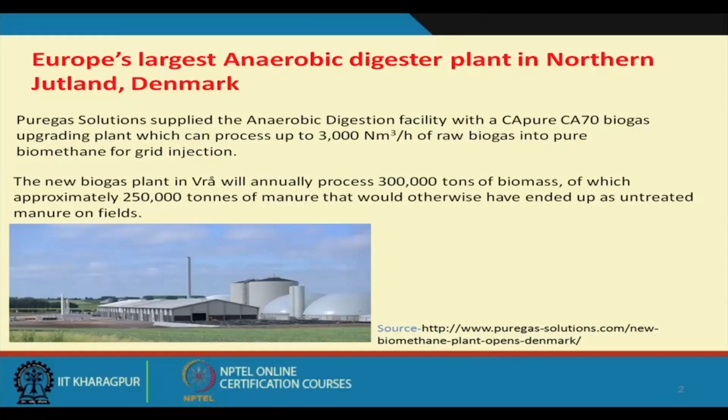Now, look at the approximate chemical composition of biogas, biomethane and natural gas, and how they are comparable with each other. Biogas usually contains 40 to 70% methane and 30 to 60% carbon dioxide. When it is passed through a purification process, what we call a carbon dioxide absorption process, we can produce about 99% methane, with carbon dioxide varying from 0 to 5%. Natural gas contains about 75 to 99% methane and alkanes, that is ethane, propane, butane, 0 to 25%.

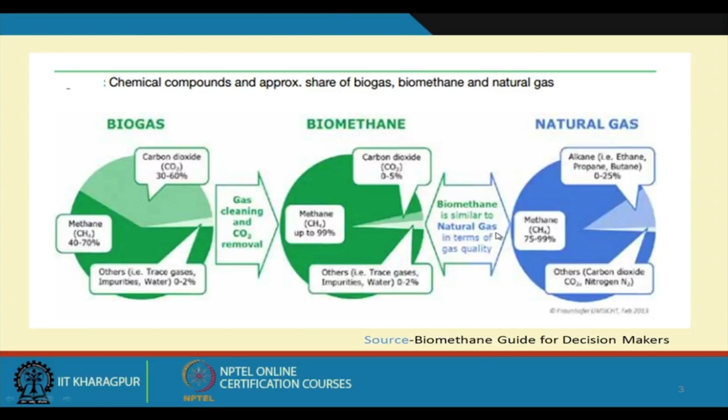So it is quite comparable. As I told you, in our country CNG, compressed natural gas, is used for running vehicles, largely by the transportation sector, and it contains mostly methane. Now, this biomethane satisfies all three principles: security of supply, sustainability and competitiveness.

Security of energy supply: a strong need exists to minimize the risks of exposure to fossil fuel price volatility, and to ensure the security of energy supply by diversifying the existing energy production sources. Sustainability: since we are using this process from waste material, this waste will be available, so this process can be sustainable for a long period of time.

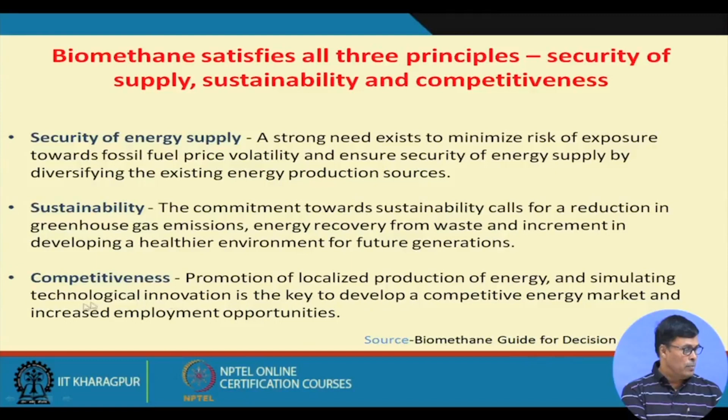As I told you, the biomethanation process has several applications: electricity generation, heat generation, vehicle fuel and material use. Natural gas is used as a reactive carbon source in chemical processes, for example fertilizer production, and it is largely used in iron ore reduction. So biomethane has tremendous potential in the market.

Now, this is a table which compares CNG and raw biogas. You can see how they are comparable with each other. So that is how biogas plays a very important role in the world market.

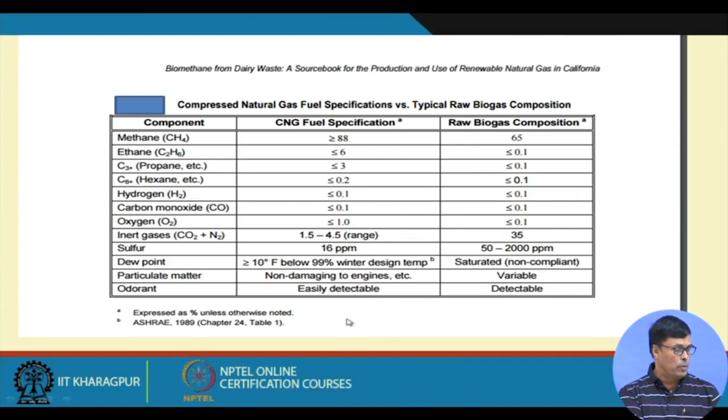Biomethanation turns waste into energy, producing low carbon gas while restoring the soil. Most high carbon fuels, when burned, produce a lot of particulate matter in the air that causes environmental pollution. Since methane is the lowest hydrocarbon, the amount of carbon emission is very low compared to any higher hydrocarbon. So it is environmentally safe.

Now, I told you that I want to make a comparative study with the chemical process, how methane produced chemically compares with the biological process. Methane can be produced from coal. The chemical route is from coal, and the biological route is from distillery effluent, with our basis being 100 cubic meters of methane production per day.

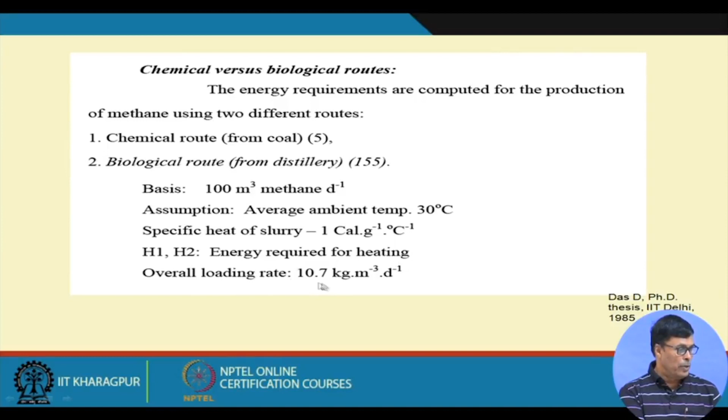Assumptions: ambient temperature 30 degrees centigrade, specific heat 1 calorie per gram per degree centigrade, H1 and H2 are the energy required for heating, and overall loading rate is 10.7 kg per cubic meter per day. Now, this is the biological process. As I told you, it is operated in 2 stages: acidogens and methanogens. In the acidogenic process the retention time is 1.5 days, and in the methanogenic process it is 6 days.

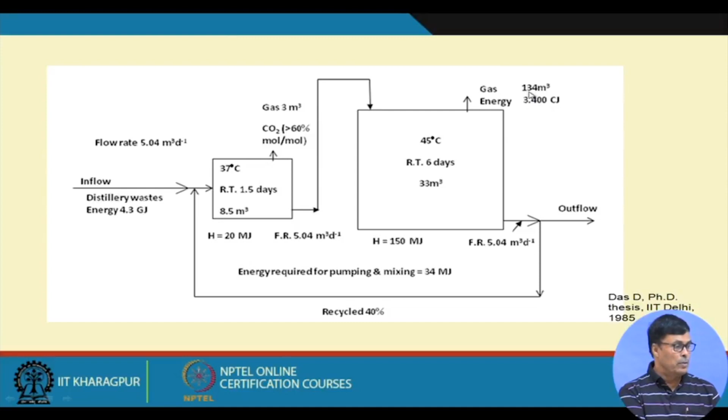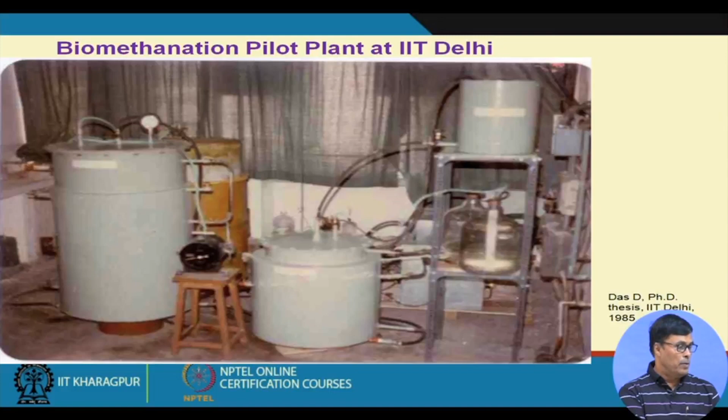So this is the 2-stage process we operated at IIT Delhi. This is the acidogenic reactor, this is the methanogenic reactor. This is the pilot plant we operated very successfully, and we find that the distillery effluent can be very easily used, and we use it for the production of methane and carbon dioxide.

Now, if you look at the chemical routes, how the carbon is converted to methane, this is by using gasification and methanation. This is the stoichiometry of how methane is produced. In partial hydrogenation, this is the stoichiometry that we have. In the direct hydrogenation, the stoichiometry of the process is like this.

Now, when you make a comparative study of the thermal efficiency of the ideal process for conversion of carbon to methane, the basis is 100 cubic meters of methane production. We have 53.2% efficiency in the case of gasification and methanation. In the case of hydrogenation, from carbon it is 65.3%, hydrogen from the product methane.

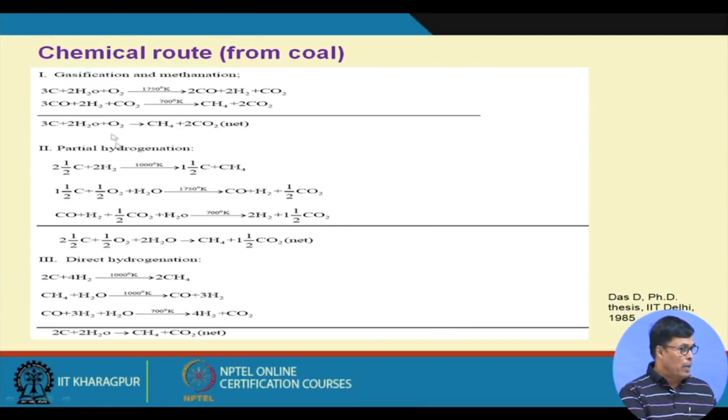I can show you this: the gasification and methanation, partial hydrogenation and direct hydrogenation. If you look at these processes, the second process appears to be better as compared to the other 2 processes. The partial hydrogenation is good from the energy point of view; it is quite attractive. Now, that is how we compare this process with the biological process.

This is very interesting: the energy content of the substrate in the form of carbon, in the case of coal, is 3.999 gigajoule, and in the case of the biomethanation process in the form of distillery effluent it is 4.3. The external energy requirement here is 1.205 gigajoule, and this is 0.204, because this process occurs at high temperature and high pressure, while this occurs close to ambient temperature and atmospheric pressure. So the net energy required, this plus this, will be like this.

And here gross energy requirement means how much energy is required per gigajoule of product. So here we find in the chemical process 0.35 gigajoule of energy required per gigajoule of methane production, and in the case of the biomethanation process 0.06 gigajoule of energy required per gigajoule of methane production.

So this is a very interesting parameter, what we call net utilizable energy product. This is equal to externally utilizable energy minus secondary energy input. This is what we call secondary energy input. So externally utilizable energy is this much, this minus this divided by primary energy available in the form of raw materials. That gives 54.9%, and this is 74.3%.

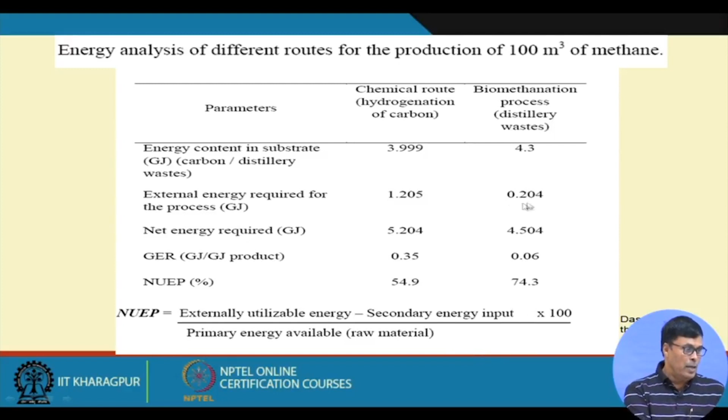That means the energy that you get in the form of methane you can largely use for other purposes, because of the energy you recovered in the form of methane, a smaller amount is required for meeting the energy requirement of the process. This is how we can justify that the biological process is more attractive as compared to the chemical process.

Now, other stoichiometry I have. This is the kind of equation that we have: 1 mole of glucose produces 3 moles of acetic acid, and 3 moles of acetic acid produce 3 moles of carbon dioxide and 3 moles of methane. And again when you oxidize this methane, you require 6 moles of oxygen.

So if you convert it, how much kg of methane per kg of BOD, this is the equivalent amount of BOD. This is 48: 3 into 12 plus 4, that is 16, and 16 into 3 is 48. 48 divided by 192 is 0.25. That means per kg of BOD removal, the theoretical production is 0.25 kg.

Now, if you multiply it with 22.4 liters, since we know at NTP 1 gram mole of gas is equivalent to 22.4 liters, you will find 0.25 kg of methane is equivalent to 0.35 cubic meter of methane. Now, this is the equation that we have, where E is the efficiency of waste utilization, normally ranging from 0.6 to 0.9 under satisfactory operational conditions.

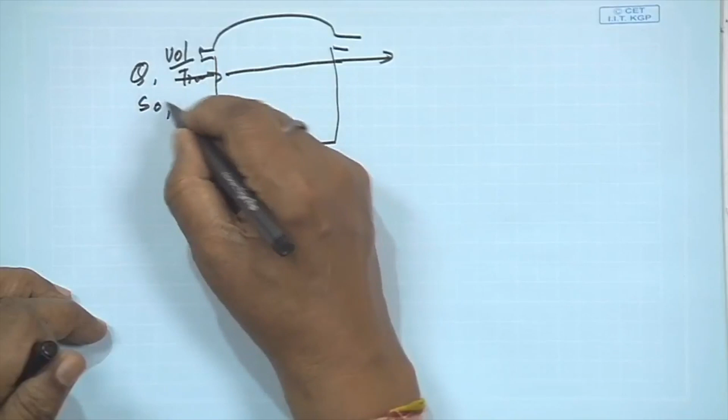Now, Q is, I told you, suppose this is the anaerobic digestion process, and you are passing Q, the flow rate, and S0, the substrate. So, what is the unit of Q? Q is volume per unit time, and the unit of this is mass per unit volume. So, if you multiply Q into S0, it is nothing but mass per unit time.

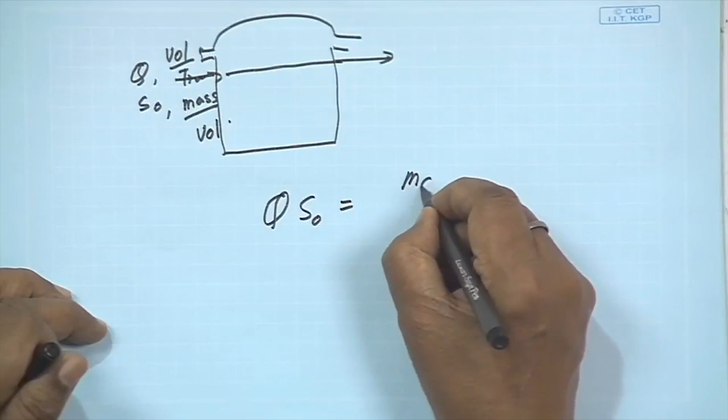So, now if you multiply it by utilization efficiency, that is E, then what will happen? If you multiply this by E, then how much of this biomass can be converted into gas, that you can find out. And you have already seen that 1 kg BODU can produce 0.35 cubic meter of methane. So, if you multiply by this, you will get how much methane is produced.

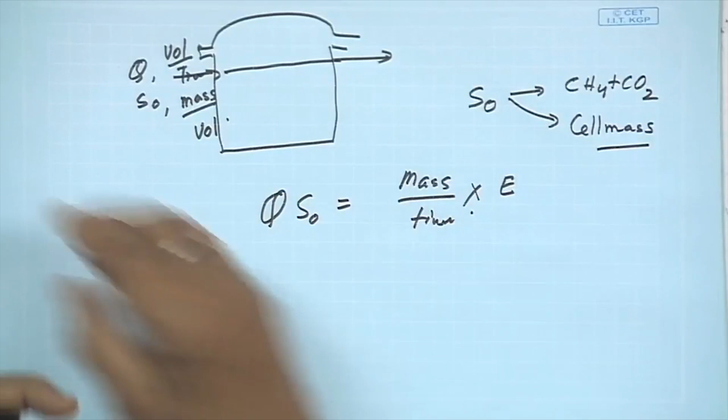Now, problem is that when you consider this conversion process, I told you, a part of this substrate will go for the methane and carbon dioxide, and a part will go for cell mass production. So, cell mass remains in the system. So, when you consider the conversion, the amount of energy stored in the form of cell mass, that also you have to minus.

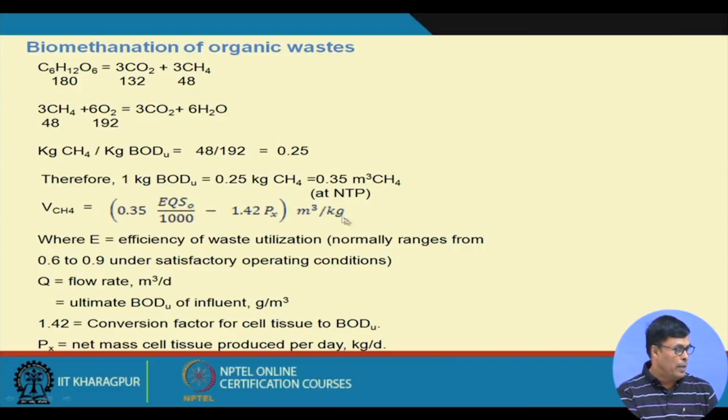We have already seen that for the oxidation of 1 gram of cell mass, you require 1.42 grams of oxygen. So if you minus this, then you will find the exact amount of methane produced per kg of waste. This you can calculate. Now this is the equation. This is the rate of cell mass formation. It can be expressed like this.

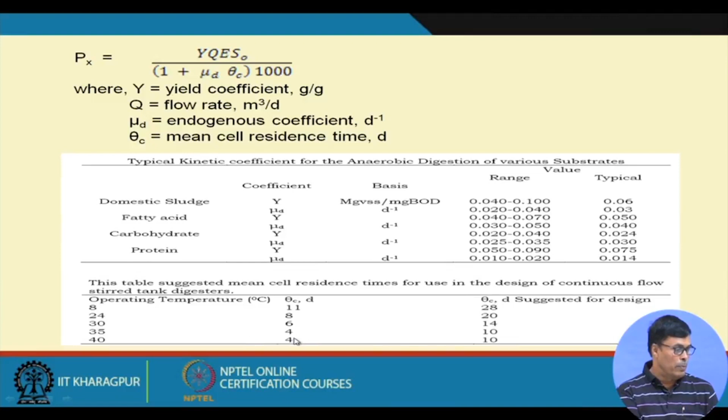This is the formula that we have, and this is the typical kinetic coefficient of the anaerobic digester for various substrates. We have domestic sludge, fatty acid, carbohydrate and protein. The yield coefficient and specific death rate constant vary from each other, and the table shows the mean cell residence time, what we call solid retention time, which will be different at different temperatures. At higher temperature this will be reduced, because your organisms will be more active.

Now I want to solve one kind of problem that is very much useful for the anaerobic digestion process. Estimate the size of digester required to treat the sludge from a preliminary treatment plant designed to treat 38,000 cubic meter per day of wastewater. Find out the volumetric loading, estimate the percent stabilization and amount of gas produced from the wastewater to be treated. It has been found that the quantity of dry solid and BOD removed is 0.15 kg per cubic meter and 0.14 kg per cubic meter respectively.

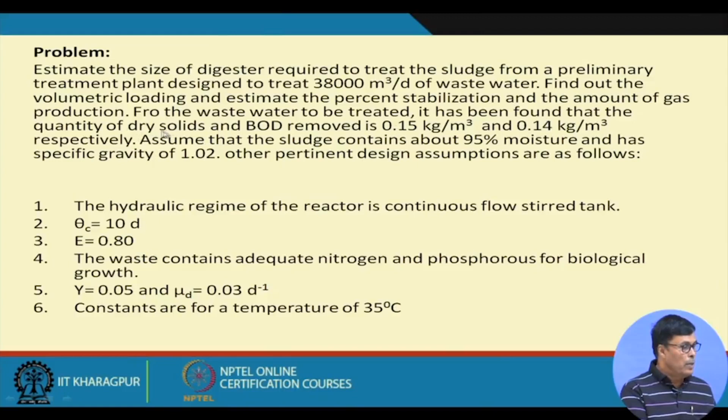Assume the sludge contains 95% moisture. It has a specific gravity of 1.02. Other pertinent assumptions are given below. You have to find out that. So first we shall have to find out the sludge volume. We have already seen this here. The dry solid content is 0.15 kg per cubic meter, and this is the flow rate. If you multiply it by this, you will find the total amount of sludge.

It contains 95% moisture, so you divide by 0.05, you will get the wet mass, and the wet mass has a density of 1.02 into 1000 kg per cubic meter. If you divide by that, you will get the volume of the sludge. And then similarly you can calculate the BODU loading to be removed. The digester volume you can easily calculate by Q into theta C, and you can find out the volume of the digester.

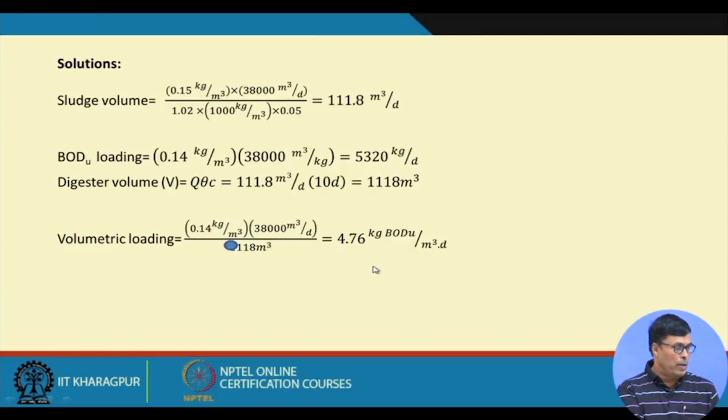Then volumetric loading is how much total solid we are putting in the reactor divided by the volume of the reactor. Per unit volume of the reactor, how much solid material you are putting in the reactor, that is considered as the volumetric loading. Now rate of production of the cell mass can be expressed like this. I have already shown, and this value is like this.

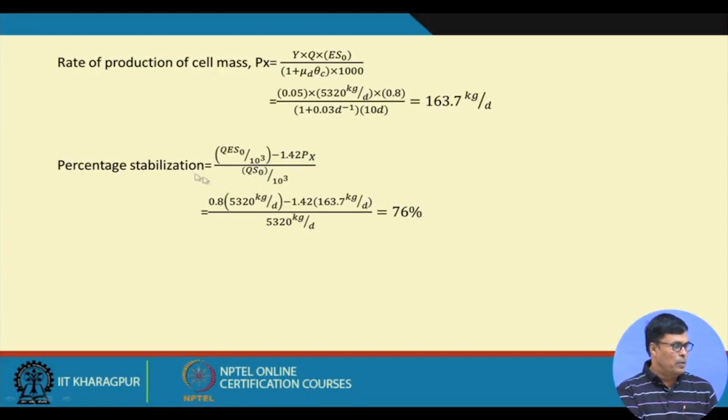Percentage stabilization: this is the substrate removal efficiency, how much substrate is removed, and this is how much substrate is in the cell mass present in the reactor. If you minus this, then you will find the actual amount of BOD removed for gas formation, and this is the input of the substrate. So if you divide by that, you will get the percentage stabilization. That is how you can calculate 76%. For the rate of methane, we already have this equation. You put the different values in the equation, you will get how much methane is produced.

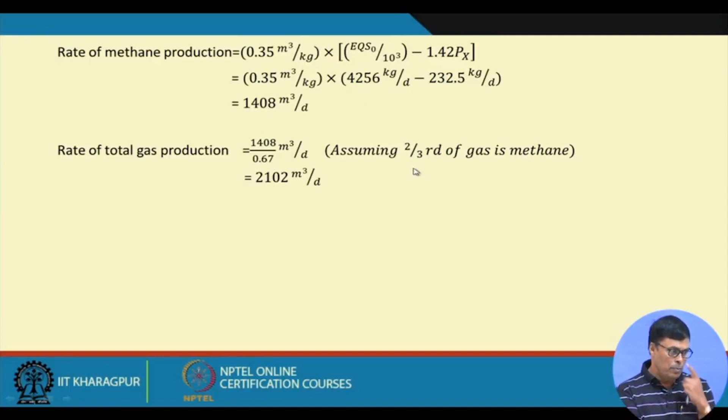Now if we assume 2/3 of the gas is methane, we can find out the total gas produced in the system. I want to share with you a very interesting process called landfill gas generation. This process is largely in operation in Western countries, but unfortunately not in India, because every country generates a lot of solid waste every day, and per capita production of solid waste in cosmopolitan cities is much higher compared to villages.

Villages produce quite less, because it has been observed that the amount of solid waste generated per person per day also determines the economic status of the people. A typical example: in the USA, the per capita production of organic municipal solid waste is about 2 kg. But in cosmopolitan cities in India, it is around 0.5 kg. So that indicates the economic status of the people, and the difference is huge.

But one thing we should remember is that our population is very high compared to Western countries. So even though per capita production is very less, if we multiply it by the number of people, the total amount will be very high. So what I want to point out is that the availability of raw materials is very high.

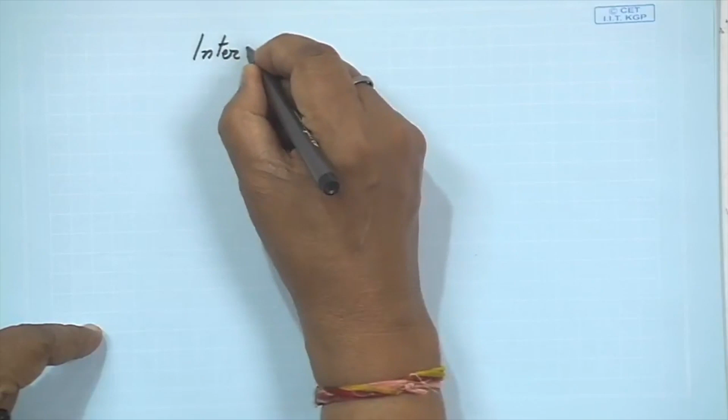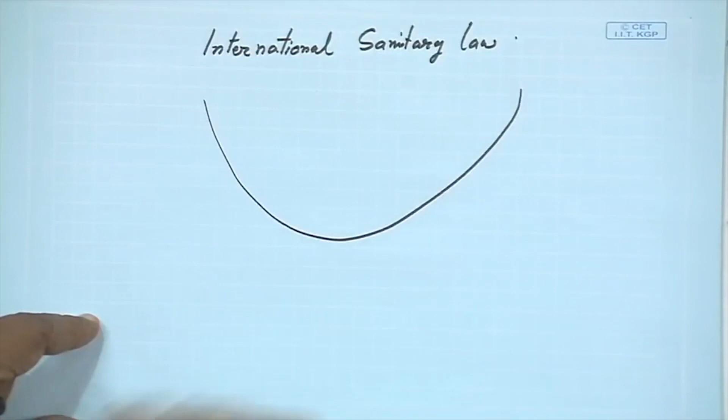But the only problem is that in India we are not following the international sanitary law. This law says: suppose this is the landfill where you put your waste. If you dispose any kind of solid waste, within 24 hours it should be covered with a 6-inch clay layer.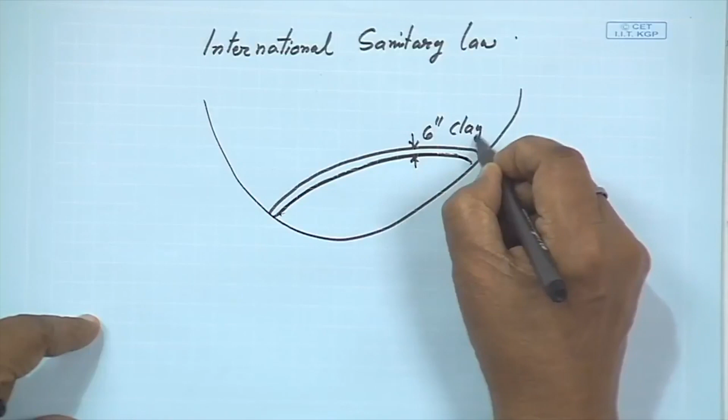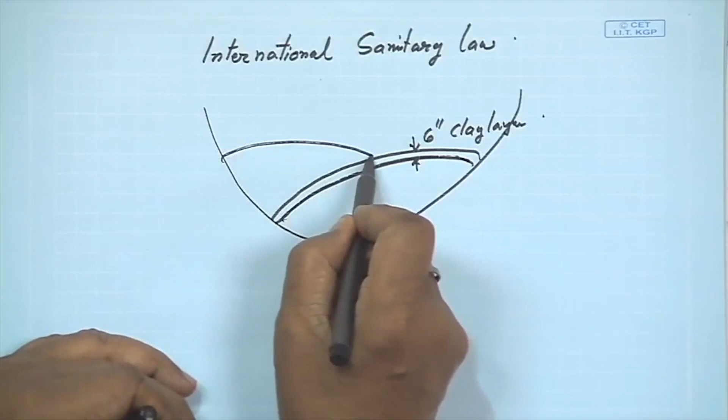Why? Because they observed that within 24 hours biodegradation will take place, and since biodegradation takes place, a lot of bad gases will come out to the atmosphere and pollute the environment. So to safeguard the environment, within 24 hours it should be covered with a 6-inch thick clay layer. Like this, you can have another layer, and another layer, and fill up your landfill this way.

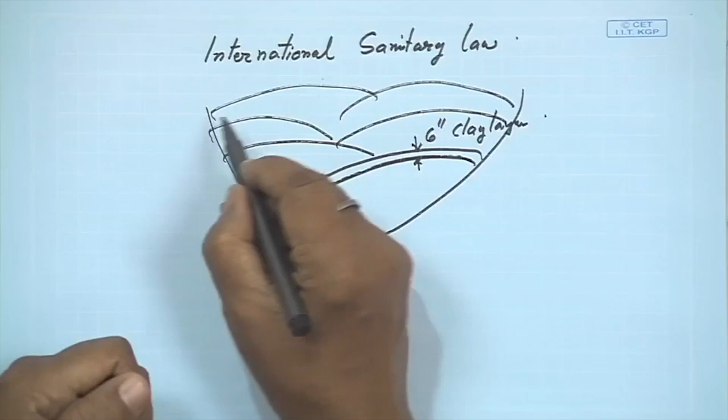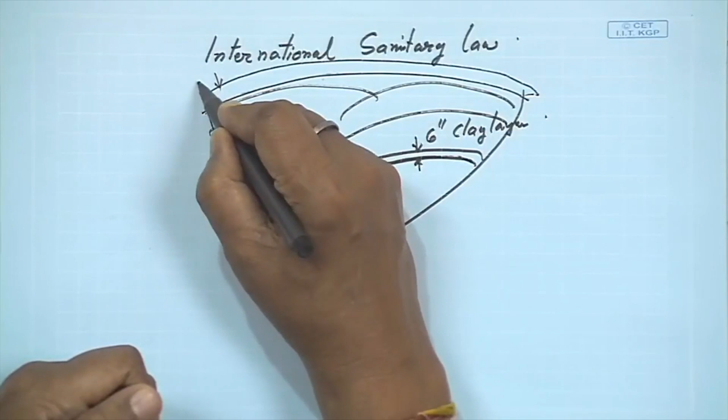This is the international sanitary law. At the end, when it is totally filled, it is covered with a thick layer, maybe 18 inches thick, to ensure no gas goes out from the system.

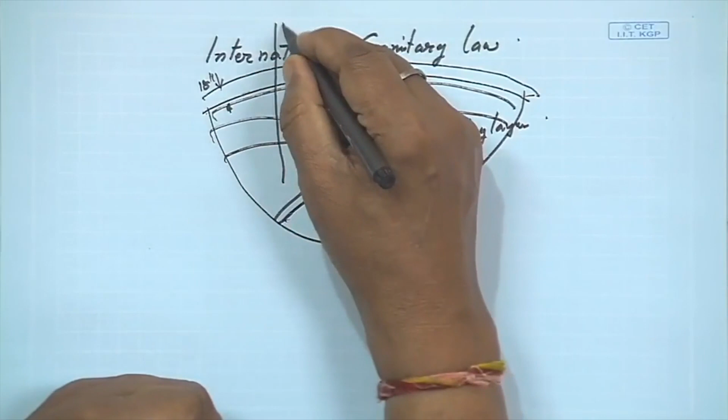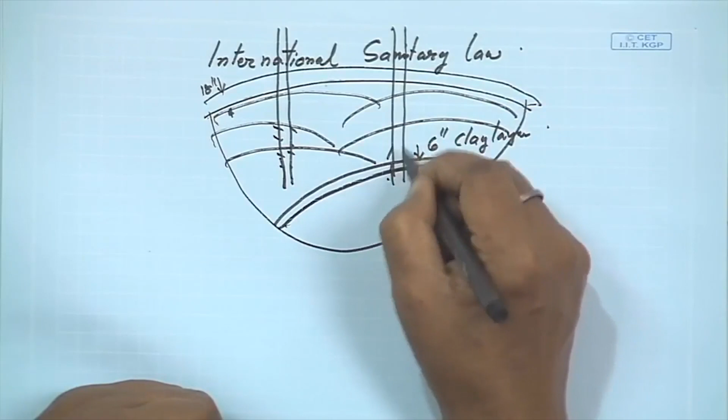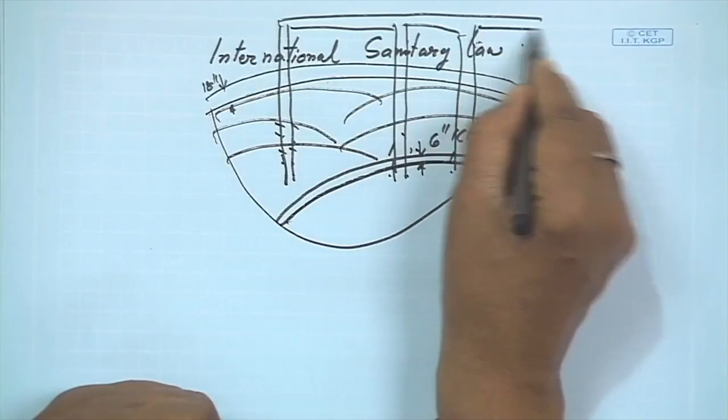Then they make a well using perforated pipes put inside. We put different perforated pipes here, and interconnect them. If we create a little vacuum in the line, then whatever gas is produced will come through here. This gas mostly contains methane and carbon dioxide.

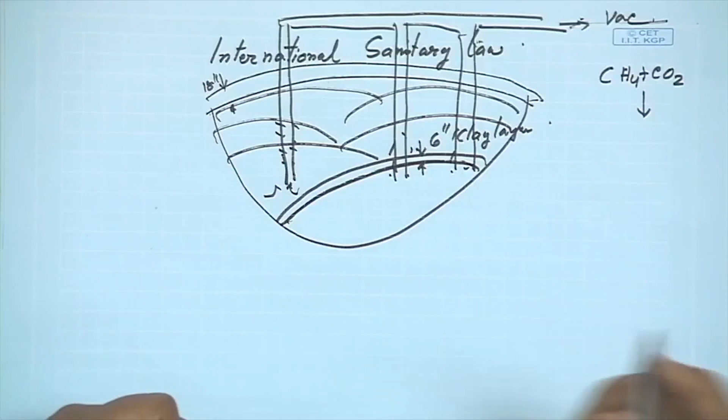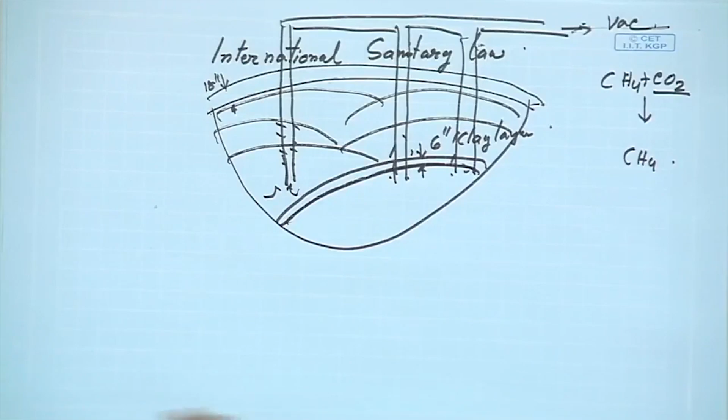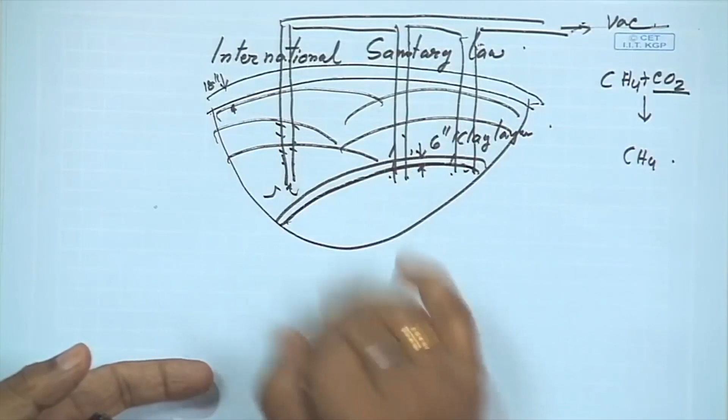Then we pass it through a carbon dioxide absorption column, remove the carbon dioxide, and get pure methane. This is largely practiced in Western countries, and after the stability of this process, they can use this landfill to prepare beautiful parks, playgrounds, and amenity centers. The only disadvantage is that nobody can build a multi-story building here, because the soil quality is not as good as normal soil, though it is considered very fertile land, good for parks and playgrounds.

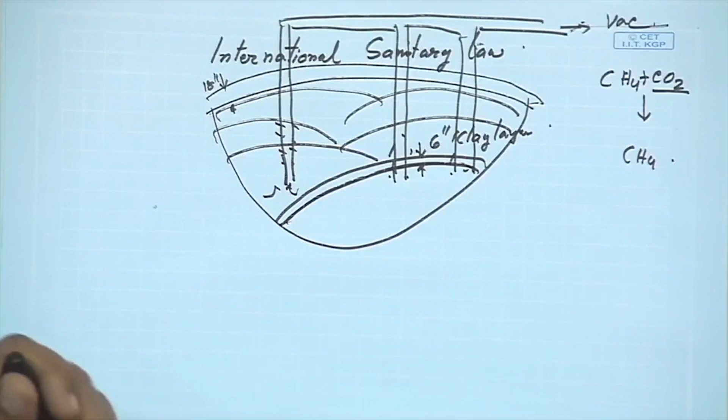I was thinking about how best we can utilize municipal solid waste in India. I was considering that the age of the landfill is 5 to 10 years, which is pretty long. So we did some research work to find out how this time can be reduced, because acidogenesis is much faster compared to methanogenesis.

So what we did was carry out the acidogenic reaction in a particular reactor. We build up the solid bed and sprinkle the acidogenic culture, recycling it again and again until stabilization takes place. When we find the bed is totally stabilized, we pass the liquid through the methanogenic reactor.

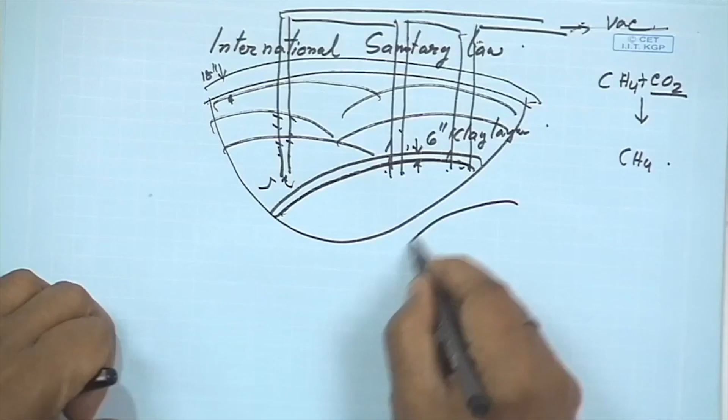Our suggestion was this: as time passes, in cosmopolitan cities land becomes very costly. As landfills fill up with waste material, new sites have to go to distant places, so the hauling distance increases drastically, and as hauling distance increases, the cost of transportation increases to a great extent.

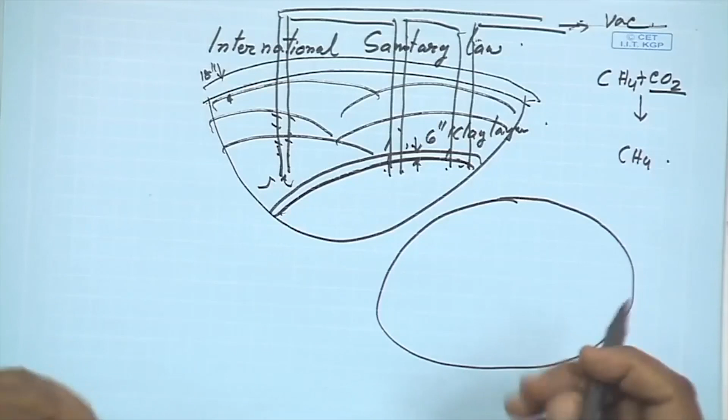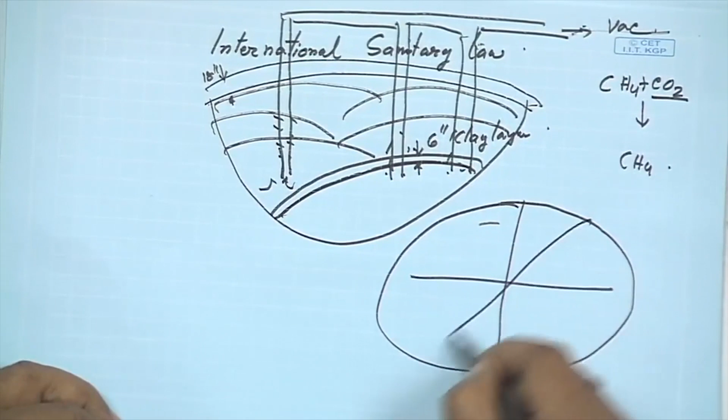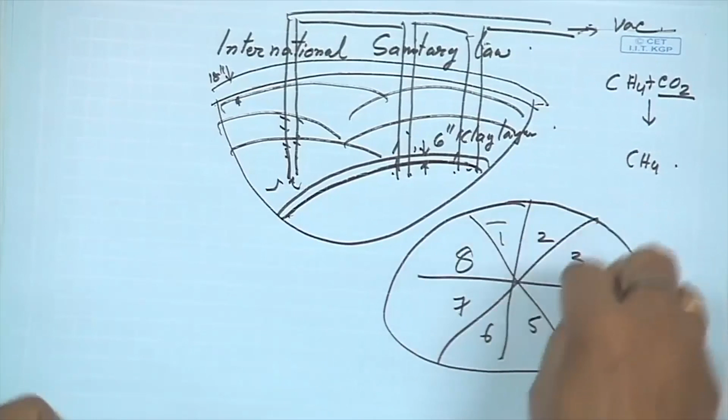Our suggestion was that if you identify one particular piece of land in a cosmopolitan city, you can divide it into sections, say 1 through 8, with different wells, and put the raw materials in one after another. Through our research we found that stabilization of this reactor hardly requires 40 days.

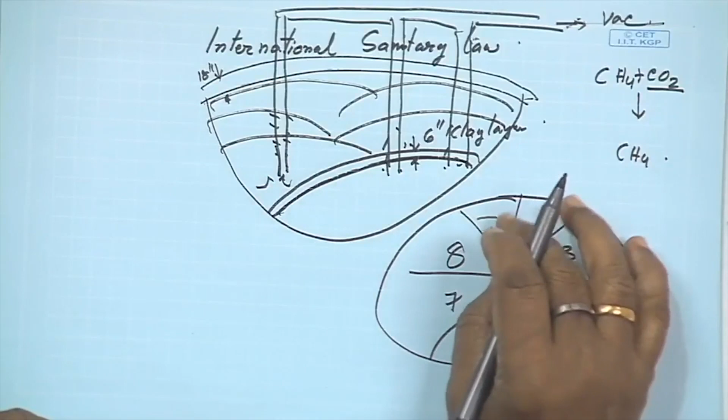So if we keep material here for 40 days, the organic material will be totally stabilized. Then we can fill sections one after another, and after 40 days start vacating that land. The digested material can be taken out and used as organic fertilizer, and whatever liquid is there can be passed through the reactor to produce methane and carbon dioxide.

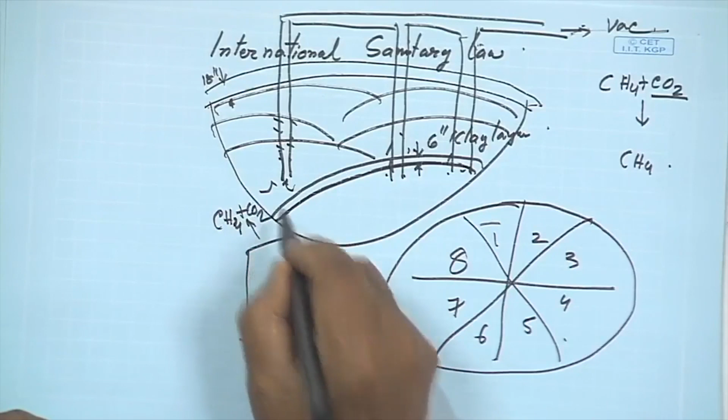Outside, this liquid can be passed through the reactor to produce methane and carbon dioxide, so this can be largely used. This is the kind of solution we have, and this is how industrially the landfill operation works.

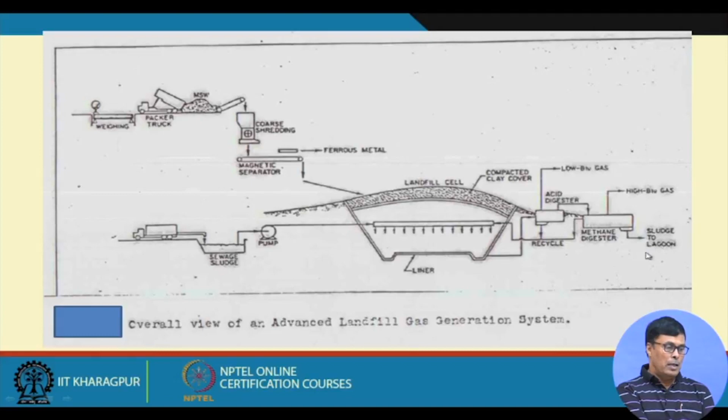There is a screening process: the weighing truck comes, we take the weight, and after unloading we take the weight again to find how much waste was there. Then it passes through the shredder and magnetic separator, then goes into the landfill. We recycle this, take the liquid out, pass it through the methanogenic reactor to get methane, and the sludge can be used as fertilizer.

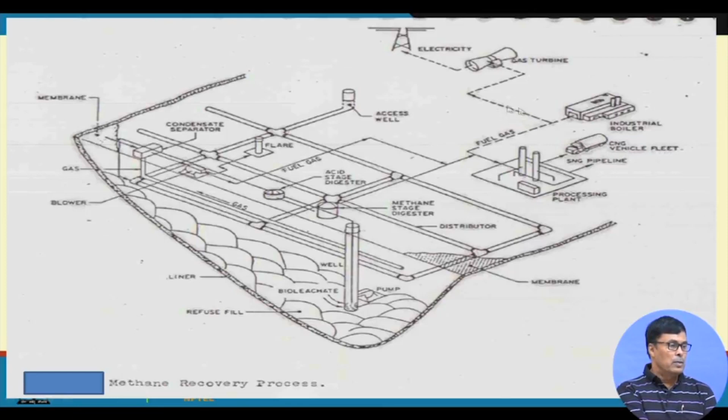So landfills have very vast potentiality. When I had the opportunity to work in the Timarpur landfill area in Delhi, I found that because we don't follow international sanitary law, gas is escaping from the solid material.

I was surprised to observe at least 30 to 35 pockets with constant flame. When I asked how the flame was burning, they said truck drivers, when unloading waste, might throw away a lit cigarette, and since methane is coming out, contact with it produces a flame. At night it looks like Deepavali across the whole land, so we are wasting a lot of energy.

So we should think seriously about how to fruitfully utilize that energy for human benefit. In conclusion, anaerobic digestion has shown a lot of potential throughout the world, and it is useful not only for industry but also in the domestic sector, for individual families, for communities, and for municipalities. They use organic material for the generation of biogas, which can be used as an energy source for running vehicles and other things.